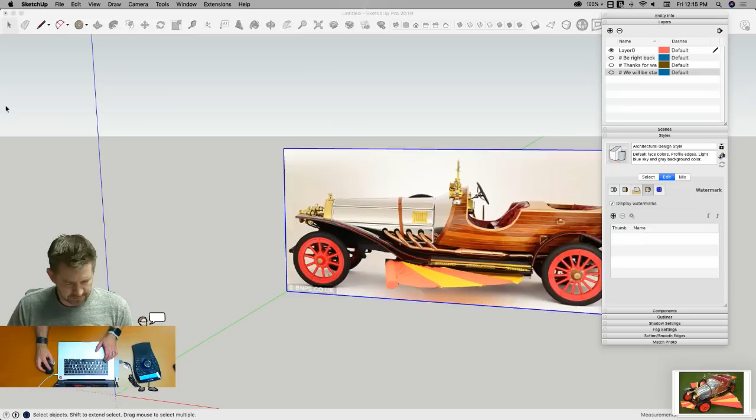So now let's load that as a watermark. Andre says you can convert it on any web-based service. Does my laptop count as a web-based service? That's where I'm working from. Probably not so much. All right, so we'll get this.

Oh wow, LT7 did that drawing, the steam engine drawing, with his students. Oh, that's awesome, to get them involved in engineering. That's pretty cool, I like it, makes me excited. Very cool, you did a great job, that was pretty awesome to see.

All right, there we go. So this is what I'm gonna work with. Now that I have some stuff in here, I'm gonna go save this. Save on the desktop, I'm gonna call it CCBB for short, because I might have a typo and then this whole stream will be rated PG-13 because I put the wrong letter in there. All right, so here's what we're gonna work from.

I'm gonna use this primarily as reference, so everything stays relative size-wise, and then do most of the modeling based off the image over here.

So one of the first things I'm gonna do is get this front part modeled. It looks like it's actually like a circle, like a cone shape that goes out like that, and then kind of blends down maybe into the bottom down here. Actually, this may just go all the way around. And we're gonna have this cool lofting shape we'll be able to pull up right here. See right here? We'll do a loft, kind of Iron Man's helmet kind of thing right there.

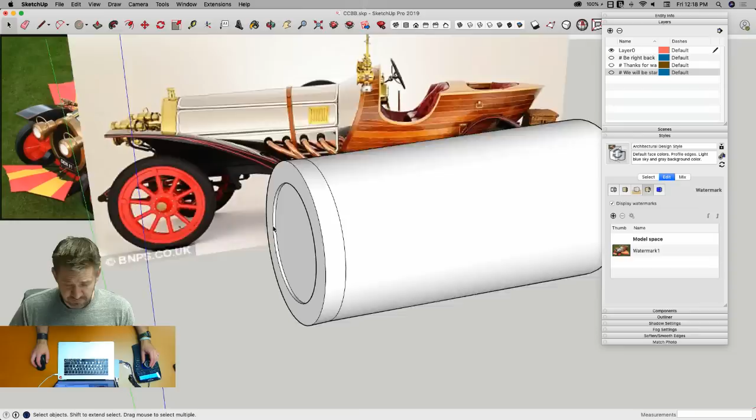I'm trying to think the last time I watched this movie. It's been probably years, I think I was a kid last time I saw it. Yeah, I know I've still got T-Rex arms. I was just about to say, it does look like that. I'll just try to hang back like that. No, it doesn't help.

Yeah, I don't know, is my screen capture not working? Hold up. Get that back up and running. There we go, my shortcut keys weren't happening.

All right, so that looks pretty good, yeah, it's almost there at this point. I'm going to tackle this next piece, so this will be a loft right here, but I'm going to pull this back like this, go up to about here.

Draw on my broad stroke shapes. All right, so that's my body there. And stop and look. All right, yeah, I don't think I've ignored anybody too bad so far. Or did I? Nope, right.

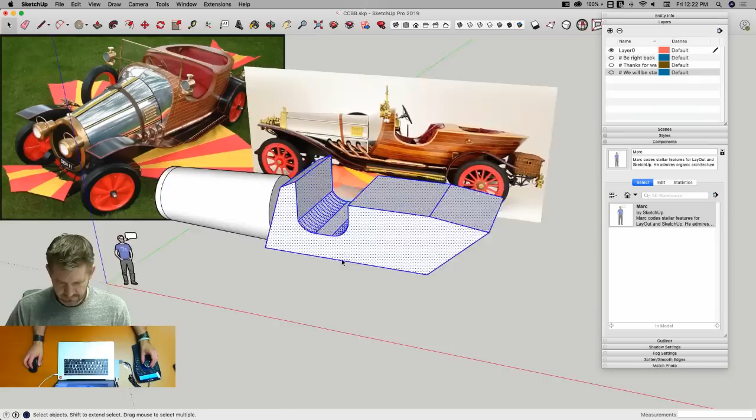Christopher Ryan saying the front is more ovaled, I think that's the word. Is the back oval this way? It actually looks like a flat top. Interesting, yeah, it does look like it's all kind of, so I may actually have to pull this up like that more, and then we'll dome it over, round it out with some lofting over here.

Yeah, you guys are looking at more images because I'm not, obviously. It does look like it ends up close to a circle here, so I think maybe I'll see how this looks. We'll grab just the front like this, scale that from the side around the middle, and bring it in like that.

We got the tried and true question here, what's the mouse you're using? All right, I'm going to do this once.

Just for reference, this over here on the left, this is my MX Master from Logitech. It has a bunch of programmable buttons, there's one under the thumb, programmable buttons over here on the side. The wheel, everything on there is programmable, so I have about 7 commands held on to this. Over on the other side, we have the SpaceMouse Enterprise from 3Dconnexion. That is a thing that I move the model around with. As I move this, touch this, you can see it moving in 3D space. I also have a bunch of shortcut keys, modifier keys, that sort of thing. So check it out, 3Dconnexion, it's a great mouse, especially if you spend any serious amount of time modeling.

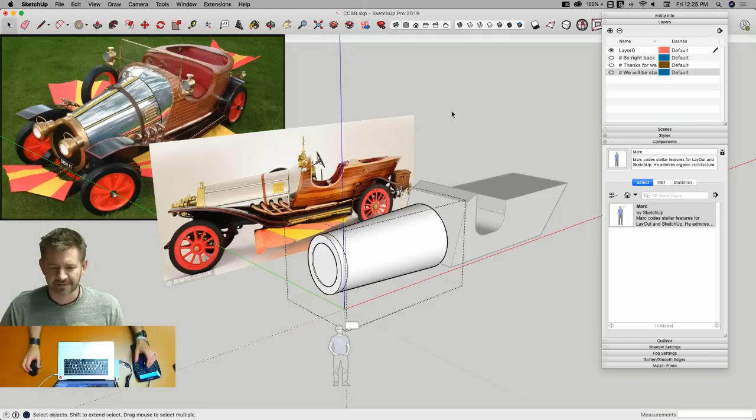All right, so on this one over here I want to do a couple things. I got to get this shape. So you can see the shape is kind of simple from the front, it looks like it comes up, does an arc to the middle, same down the other side. But then if you look at it from the side, it actually arcs this way and comes out at the bottom.

So I'm gonna make some geometry. It's gonna be 2 pieces. I'm gonna start down here. I don't know, this width was kind of arbitrary actually. All right, so I'm gonna start by, all right, I gotta hide this right now.

So it looks like the first thing I'll do, sorry, I know I'm jumping around right now, trying to organize my thoughts, it's a hectic affair. All right, so it looks like we kind of go straight and then curve off right here.

So I'm just gonna try to start with a standard arc. I'm gonna draw a line over, arc from here to here. And then it looks like maybe we got an arc from here to here. So that's kind of what I'm reading right here between these 2 images. And then this one right here actually comes out kind of like that.

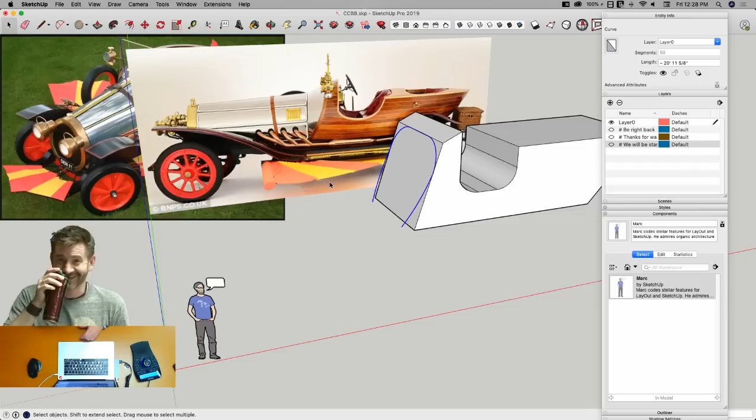All right, so there I got that. I'm gonna go to unhide all.

I know I probably already, I can hear it somewhere in the back of my head, the people who are going, that's not how you're supposed to use hide, you're supposed to put stuff on layers, turn layers on and off. I don't disagree with that, I understand that, it's cool, we're cool. Generally speaking, I would agree with that. I tend to use hide just as a way to clean up my screen temporarily. So that's kind of what I did there. I hid, I almost said hided, I hid just long enough to go in and do the cleanup that I needed to do. So forgive me if you're a hiding purist and only hide when stuff's on layers.

All right, I'm gonna move this piece. See, I just created a plane at the bottom of where my curve is. I'm gonna move this piece back so it comes right up against the edge. And then I'm gonna draw a line in context to break this circle.

All right, so now I have that shape. I'm gonna grab that outline, I'm gonna weld that, and I'm gonna copy it. I'm gonna leave context and paste in place. Now I can take both of these and temporarily hide them.

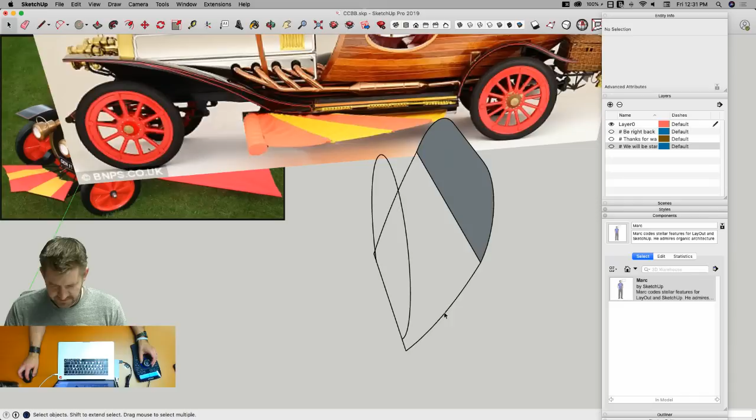What's going on there? What's that about? All right, scoot this all back to line up. Is it vertical? Something's not right here, something's not lining up. All right, there we go. It's up, I was trying to move it left and right.

Oh no, just a little extra segment, extra line. Not a huge fan of drawing lines. Really hard to zoom in and out of. There's nothing there to zoom to.

Henry's saying this is painful. I know, we're just one second, give me one second, he's almost there. I'm setting the stage, imagine if you will.

All right, I'm gonna grab this all right now. There we go. And we'll do the same thing over here. All right. What just happened? All right, give me just this.

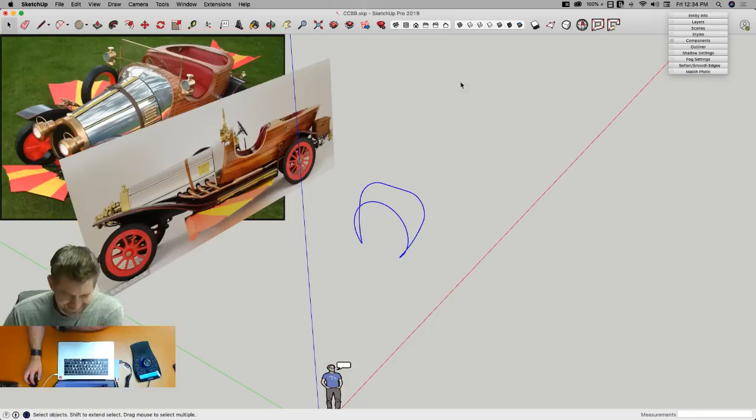All right, we got some funny comments on the YouTube channel. All right, let's try scanning these two.

Everything works great till you got 100 and something people watching. No pressure. Yeah, you guys see me push the button, right? I mean, you can see, oh, I missed. Ha! Well, that's what you get for being a smart guy.

All right, I'm gonna try. That's weird. All right, I'm gonna try. Let's go back here.

I'm just gonna restart SketchUp, will that deactivate it? Yeah, I mean skin contours, like nothing's coming up. The UI is just not even showing up at all. So I'm gonna save and close it.

And we'll start it again. Odd. Well, if everything worked, it would just be too easy, unbelievable. Yeah, so what, everything's not perfect like that. All right, let's try.

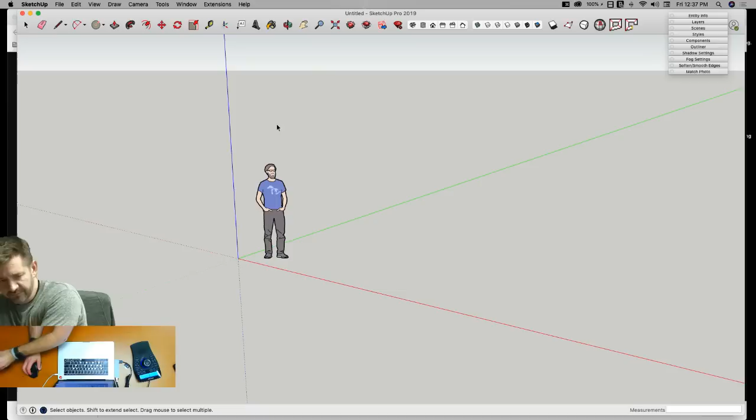How was everybody's weekend last weekend? I didn't get to hang out with you guys. I was near Boston doing some training. So yeah, we didn't get to hang out. I hope everybody was doing well. It was good, it was a lot of fun for me to hang out and teach people SketchUp. It's actually something I've never done before. I've never actually taught a from-the-ground-up new people training, so it was kind of cool to get to do that. But I did miss being here.

It was a bummer. All right, let's re-enable this. Apply changes. And not Fredo Corner.

Oh, now I got to restart again to get that to show up. Curviloft. There we go. Whoops. Yay!

Get this side view. All right, so would Sandbox help for this issue? I honestly don't use sandbox tools a lot for something like this. I generally end up using sandbox tools on a flat surface.

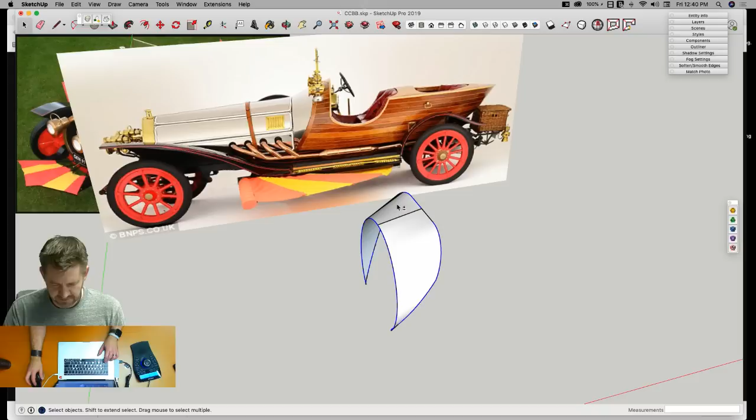This is actually something we were talking about before, the idea of having a symmetric component and modeling it in half. It looks like most of this vehicle is actually symmetrical, so we could model in half.

But I'm gonna work back from this piece in the front and just kind of work back. So I'm gonna take these two, group them together, explode those, and then we can come in here and smooth that piece. And we'll go to edit and unhide everything.

All right, so that's what we got going on now. I'm gonna take this piece, slide it back. Ooh, look at that.

Man, it looks long though, doesn't it? Let's turn off perspective and look at it right up against the picture. I'm gonna go to camera, turn on parallel projection. That looks great, kind of what it does, huh?

All right, we're gonna stick with it. Slide this back a little bit. All right, so now we got, this should line up at the middle there. That was not the middle. All right, so I'm gonna get the middle of this piece, line it up.

All right, so now we got to get this thing all flowy and smooth. I got to get out of this. Some people work in this kind of camera view, but I can't do it.

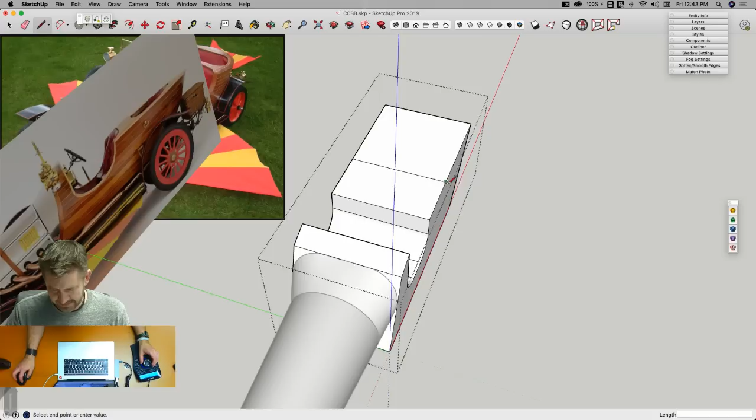That Dano guy, I wonder who that is, just said it's a phantasmagorical machine. I don't even know if that's a word. Does that mean anything I model is right? Exactly, I like the sound of that.

Or if I can do this with a standard arc at this point. Let's see what a normal arc would look like.

Looks like I just overcompensated a little bit there, huh? A little too much, I think. But here's what I'm going to do.

I'm going to grab this and slide over here, trying to be conscious of SketchUp's attempt always to join geometry back together. I want to keep away from that. And I'm kind of wondering if...

More like that. Maybe we'll grab the whole thing and squish it in a little bit. Bring it over here, flip.

How does that line up? Oh, that looks okay, looks like a toilet seat actually. Kinda does, but hey, it's not my fault, it's just the way you design a phantasmagorical.

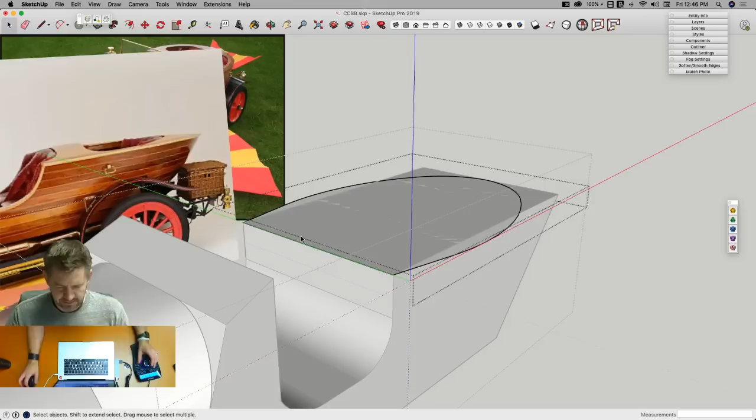So I'm going to get a couple pieces. Here's my thinking, this is the thought going through my head right now, good, bad, or whatever. Is that, you know what, this is actually going to be...

So ignoring the doors right here, this definitely looks like it tapers down into the end of this cone shape right here. So if I was to draw a line like that, draw a line over on the green axis till I hit this face, and then maybe something back like that.

Okay, this is something. I am going to use my hide rest of model command. So what I'm looking at, I realize I went mute there for a second. Sometimes you just can't think and talk at the same time. So what I'm thinking, I'll get this copied on the other side real quick with a couple lines, is that should taper together a little more gracefully. So I think what I'll do is take that break, where that line breaks, right here, and see where that runs out and hits this curve. It's like right there. I'll take that straight across the green axes and bring that back up to the front too.

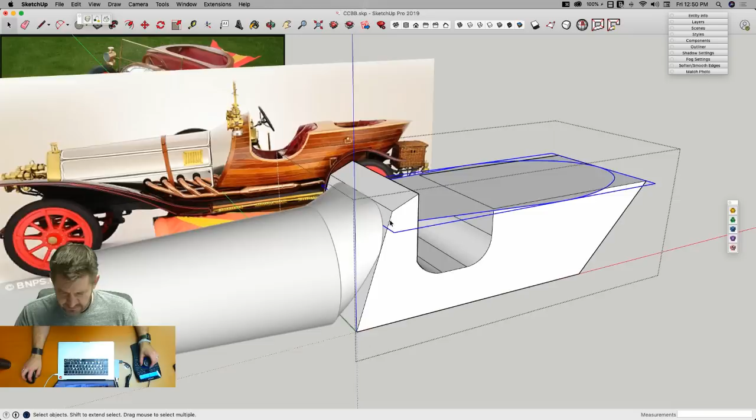I'm going to copy that. I'm going to enter this group, hide the rest, and then edit, paste in place. So I just pasted a copy in here, and now that should, if it hits, it doesn't quite hit. I wonder if I can bring it back. All right, slide it up just slightly. Doesn't quite hit, so I'm going to scale.

All right, I feel like you guys should be talking in the background or something. Like everybody's just watching me.

Lawrence has some good insight into this movie and the book. He's saying the wooden part that you're modeling right now was actually a rowing boat. Thus the boat-like shape, which makes a lot of sense.

All right, so I feel like we should be playing this song in the background too. Everyone's singing along on the YouTube channel. This is classic. Has anybody watched this movie recently? I'm just wondering. I mean, I know it's a Disney movie, but I'm wondering if it's held up, you know?

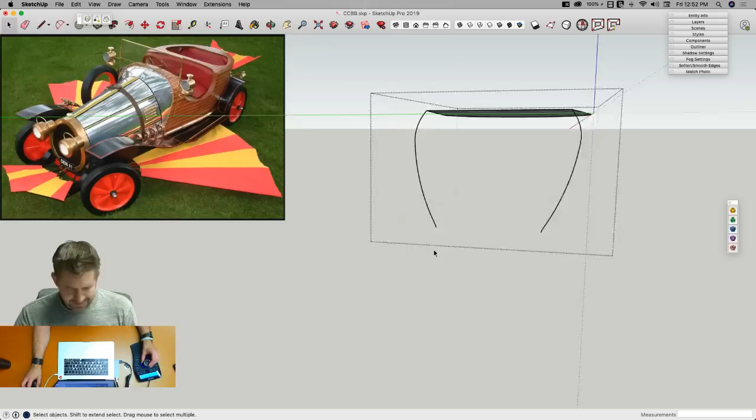And now it's gonna be a challenge because I'm gonna have to come out here and hide these temporarily again. Let's see, let me just grab this one face. Come in here, get rid of the rest of the model, and then paste in place, is it gonna hit any geometry? No, all right, so now I know what I'm doing.

More or less, I'm gonna grab this line, slide it over to here, copy it and slide it over to here. So that's the very bottom. Those should probably flare out a little bit. That actually, those will be like kind of like arcs. And then I'm gonna do this.

Alright, but I gotta get those arced out first. I'm gonna draw it like this, and take it over. At this point, I should just cut this thing in half because that's too much arc on the bottom there. Let's take that across like that. That looks better. I'm gonna do that right now.

I'm just gonna go like this, and get rid of half of everything. And save, because you know, you guys already know, I don't have to say anything else because I saved. Alright, I drop that straight down to where it would hit this line.

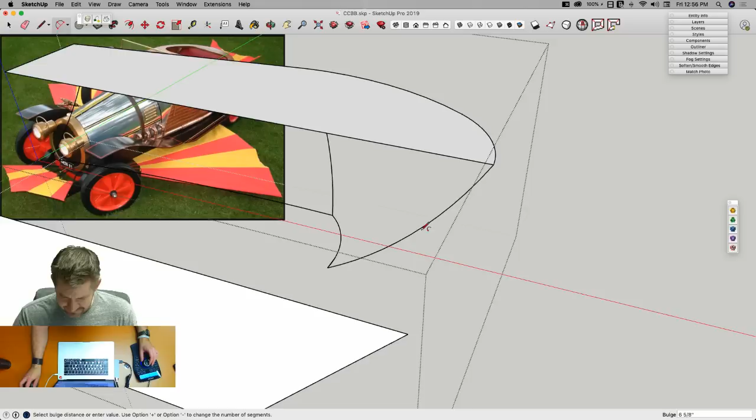Alright, I'm gonna weld that. Nope, I'm not, because I missed something. Oh, got some stuff going on here. Got more stuff going on here. Let's try that. Weld that. Nope, something else is going on over here. Got a secret edge or something happening.

So I just weld those, that becomes one curve. Weld again, there we go. 1, 2, 3. Oh, dang. Got another line here, just breaking stuff all over. So this is stream of consciousness modeling, where I just come through with less of a plan and more of a feel for what I want to get. Alright, so I'm going to try.

Meh, I don't love that shape. Sorry, I know sometimes I put myself behind my head. I don't love that shape, but at the same time, this wheel well is actually going to come in right about here and cover it up, so I'm not really stressed about that. I'm going to go ahead, go with it, see what happens. And then we'll do this front section as well.

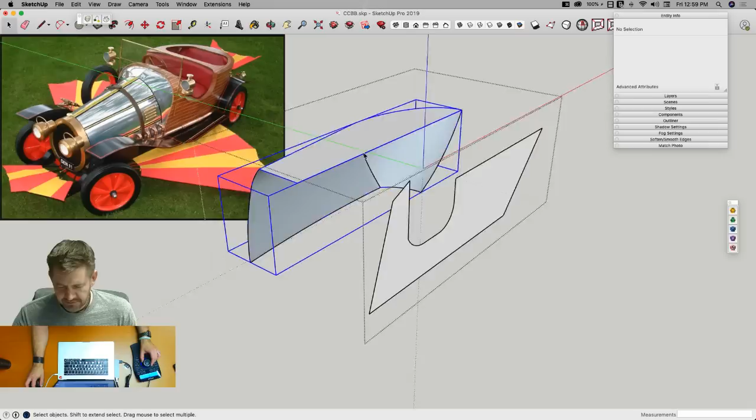Alright, now that I got that, I will shift copy, mirror it, and then throw it back together. Get rid of this. Alright, let's edit, unhide everything. Alright, and our curvy surface is coming together. Nice, looks pretty good. Hey, thanks.

Alright, so we do have this surface continues on up. It actually follows this. You can see this wood section right here follows the curve of our metal here and goes a little bit further. So I'm gonna say approximately exactly here-ish, right there is how far I want to take that out. See that? So I want to actually run a surface straight up, over and back down, and then I want to project this line onto here.

So now I'm trying to think of what the best way to do that. It looks like it's not quite the same curve, it's a little bit different. So maybe I'll just draw the curve separate. So if I come straight back, it's going to go up a little bit, maybe here. I'll grab an arc.

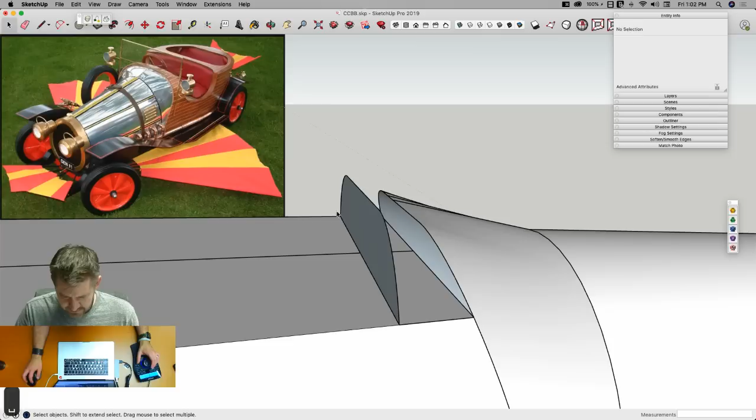I'm gonna do the same thing. I'm gonna come in here, grab these lines right here, Control C. I'm going to make a new group, come into this group, edit, paste in place. Hop out one more time. Draw a line from here to here, and a line from here to here. There we go. Copy these two, Control C, hop in here, edit, paste in place. There we go. Oops, I only got one of them.

There it is. All right, get rid of the extras, get rid of the excess. That's excess too. Grab all of that. Grab all that, skin it. Oh, I love when stuff works out the way it's supposed to.

All right, so now I can take these 2 pieces, make them a group, go into that group, explode these 2 pieces. They join together. Oh no, because I had these 2 pieces separate. Do I want to join those together now? Yeah, all I'm gonna do is cut the... yeah, I'm gonna do it. There we go, just so crazy. All right, Option, erase. Option, erase. And actually, we can just get rid of these pieces.

All right, she's coming along. Save.

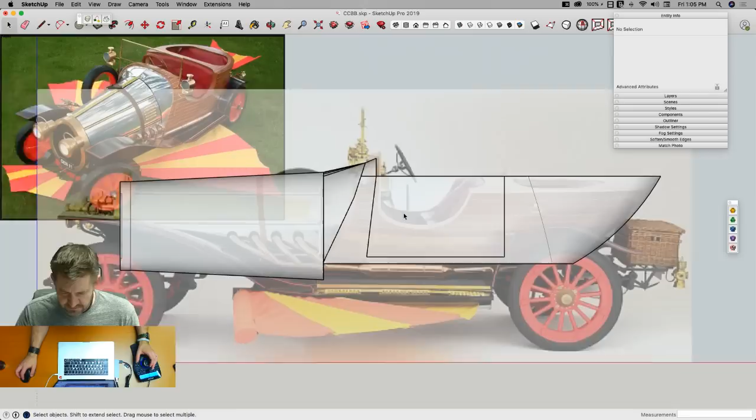All right, so first thing I'm going to do is get that down. It looks like right about here. And if I stay on the red axis, come over to about there, and then I'm going to have one, looks like a little bit of a more gradual slope here, something like that, and then...

I don't like that because if I use just the standard arc tool here, no matter what I do, I'm going to get this. So one of the things I can do, if you don't have extensions or anything like that, or if you're running on the free version, is when you have these two, what I would normally do at this point is go grab Bezier curve, throw that Bezier curve in there, and actually use this first curve as kind of my parallel line on that first part of the curve, so it actually smooths that out. If you don't have Bezier curve installed or don't have extensions, the other thing you can do is draw your first two arcs, then come in and draw kind of an arc between them to smooth that transition out.

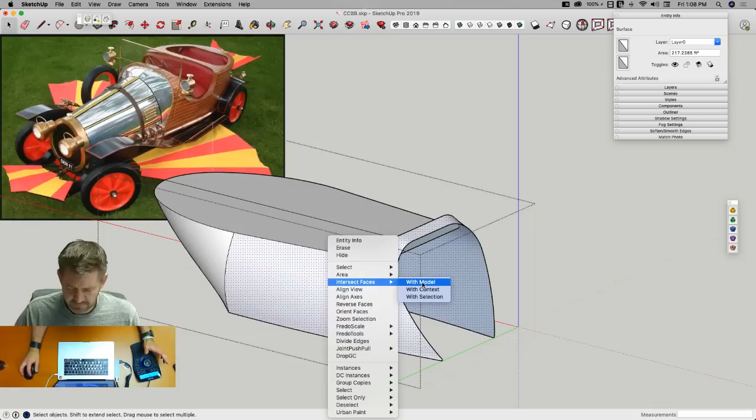Okay, so basically I'm just using this as a cutting piece. What I can do now is select this surface and right click, intersect faces with model. That's going to say any place this surface intersects any other surface in the entire model, I want to break it. So I'm going to try that and see if anything weird shows up. Nope. Sometimes the reason I say sometimes is if I have a hidden piece, or a piece outside of context I don't remember, it may cause a problem where it chops that geometry somewhere. In this case, it was all right. Did not cause an issue at all.

All right, so if we do that, we have that. Pretty cool, that looks like that'll work.

So a couple more things are happening here. One is that this has a little bit of an arc to it, something like that. And now, like I was saying before, this surface actually kind of bubbles up just ever so slightly.

I'm going to try Soap, Skin, and Bubble for that. So far I've used Fredo tools to do all of my arcing and that kind of stuff.

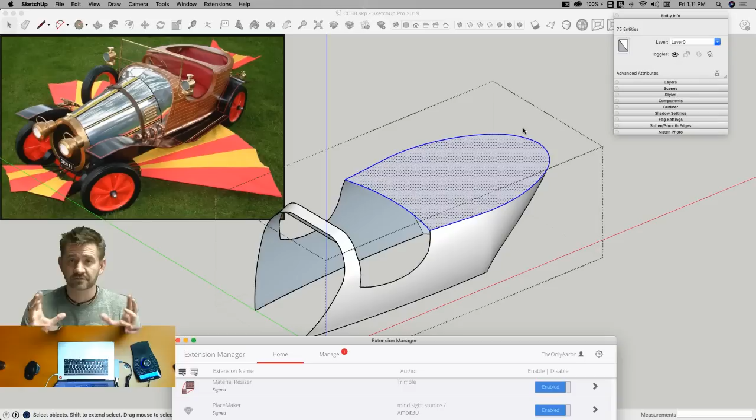My only complaint about it is the UI. If you have it enabled, the UI shows up all the time whether you close it or not. So I tend to disable Soap, Skin, and Bubble, because otherwise every time I open it, it pulls up the UI. You guys can kind of see, oops, this shouldn't be open as I give this example. I generally only have the stuff on screen that I'm using right now. So I turn, even Curviloft, which I've been using, back off again because I don't want it floating around on my screen, just the tools I need. So for that reason, I do have it disabled right now. I'm going to go ahead and re-enable it, apply changes, and you see there it is. So it's not a big nuisance, but if you have it enabled, even if you close this, when you start SketchUp again, it will show up.

All right, so what I'm going to do now is take this surface and skin it. When you first skin it, it's going to show you this grid. The denser the grid, the more smooth the final bubbled shape will be. Generally, the thing you want to keep an eye out for is these pieces at the end, that's where you're going to actually end up seeing maybe jagged shapes. So it's 10 divisions right now, I might jump up to 15. That looks like it'll work okay.

I'm going to go ahead and hit enter, and it now created that group. So it created that in a brand new group, laid down separate from the surface I had before. So brand new everything. What I can do now is actually take this and apply the pressure to it. So if I pick that group and hit the bubble button, it comes up and asks me for pressure. Let's see what 10 does.

You see, 10 pulled it down. The shape's reversed, so having a positive pressure is pushing it down, because pushing it in the direction of the white face. Just realized I'm not in perspective. So if I want to bubble up right now, I just have to put minus. So if I put minus 10, it'll push up like that. That's actually not too bad. Just for fun, let's put minus 100 and see what happens. Ooh. Minus 500?

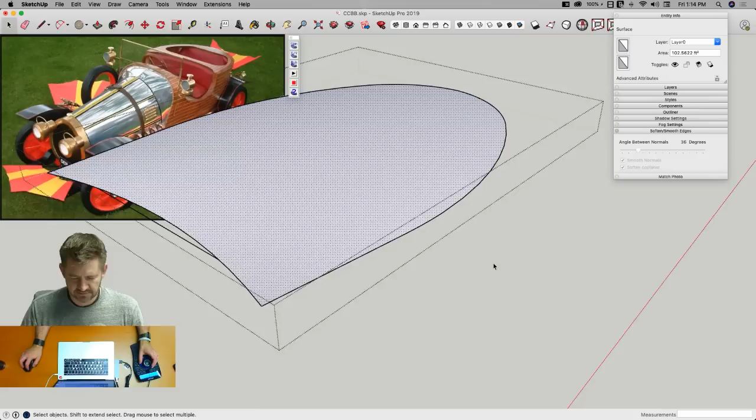And then select and reverse my face. Oop, you know what, actually I got an extra line here too. Some extra segments I want to get rid of. Before I merge this with the rest of my car, I'm going to get rid of that initial face, and now I can explode this.

All right, so there, whoops. Uh-oh, what happened here? A little overlap. Huh. All right, well, we'll need to fix that.

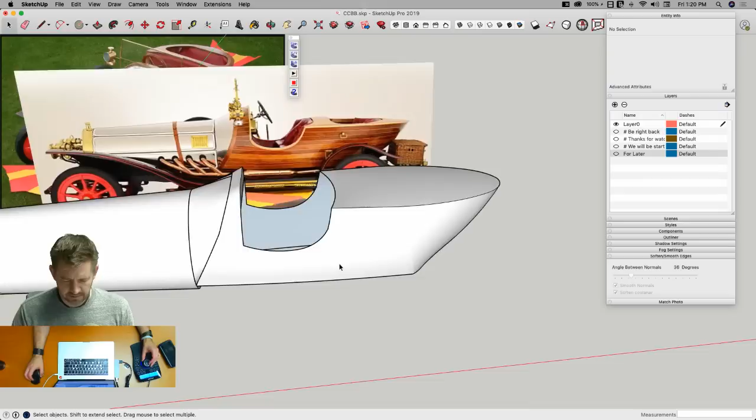Whew, that was loud. That was a loud noise.

So I think I'm gonna do that. I'm gonna trace this. Kind of looks like this is all one flat plane on the front, and then it just merges back with the side of the car. So that's cool, because this will be pretty easy.

I can actually trace this off the 2D shape, give it the depth I need, do a push-pull to make it long, and then bring it over, slap it on, and intersect it with the other side of this car. It does also make me think there might not be a reason to keep these as 3 separate pieces anymore. So I'm going to make that a group, go into the group, explode those 3 pieces, and now I have a single piece there. I'm going to call that good right now.

And we'll hop in here. I don't know if this has ever happened to you before, but my model's getting in the way of my reference image. Nice thing about reference images is that SketchUp shows them the same front and back, so if you ever have that situation, you can hop around to the other side and just trace it from there.

All right, I am definitely going to use the Bezier tool on this one. It does look like we have a flat section right here, so I'm going to trace that like that. Now I'm going to draw a Bezier curve from here. Let's see if we can do this all in one go. You know what's happening though? It's not showing my line on the back, so that cool trick I just showed is totally not useful.

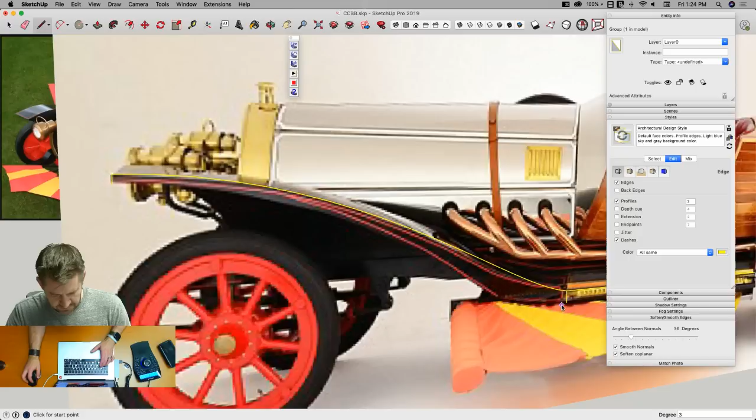up, and then over. All right, fender chunk number 1. Bring that back here. And it looks like I can start with a standard curve maybe, like that. Offset that to the opposite side.

And then maybe another, I'm going to give a little bit of vertical here. And because this is kind of going 2 directions, this is another spot where I want to use Bezier for sure. On my first line, to actually be parallel, I want that first curve to pull off of where the end is here. So I'm going to grab it like this, pull this direction, and use my lower curve to bring it back down.

Same thing here, this way. Next one down. There we go. All right, so that right there is my fender. That's pretty cool. I'm gonna clean up some of these breaks and the curves.

And I'm gonna grab all of that and make it into a group. I'm gonna go back to black lines too. Yellow's too hard on my eyes.

All right, one moment. Oh, still looks like most of our comments are coming through. Well, some of them. For some reason, Super Zorg's not showing up. I don't know why. Our streaming stuff is opposed to it.

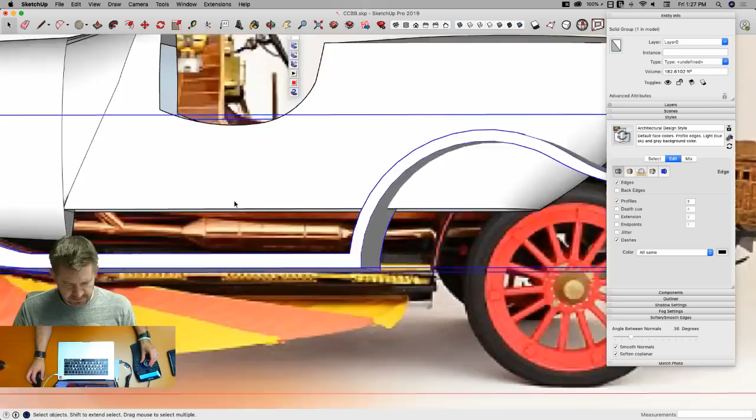Well, how about that? So, what do we do now? I'm kind of thinking that considering a lot of this will be covered up, I might do something like... trust me, it's gonna be awesome.

All right, just to give me something underneath there to attach that to. Something like that. In fact, I may even go so far as to come in here. Just get crazy. This is just craziness. Pull that through too. How far should I take that through though?

Not quite that far. I do want to see everything on the outside, so I'm going to toggle that back on. It's about to where it hits that fender. All right, I'll clean that up in just one second.

All right, now I just need something to attach to under here. Obviously, this is big, this is too big. So I'm going to come in here, and because it's separate, I don't have to worry about geometry merging, which is nice. It looks like it kind of comes out maybe there. It's actually in past the front, so it goes to, at least on the front, like about there. And then I can take this and pull it back in, something like that. That's pretty sweet.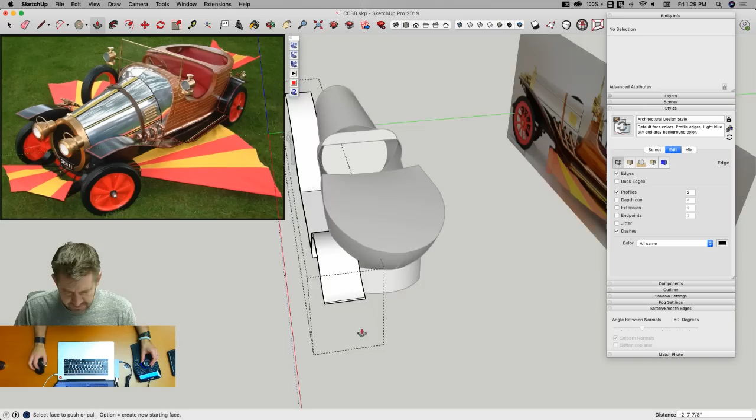But that's all I got. What I'm going to do is find a spot that's the same. So I'm going to grab this middle point right here, and I'm just going to draw a line back like that. I'm going to grab both these pieces then, copy it over here, scale both of them together to -1, and now when I grab by that same point, when I drop it right here, it'll be in the same spot on either side. So it just keeps me from having to go to a lot of work to get that stuff lined up like that.

All right, that looks pretty cool. I like that. I think I want to do something here because this is kind of nondescript. There's something going on underneath here. I'm sure if you were a car knowing type person, you'd know those undercarriagey type things. I don't. There's stuff under there that does stuff.

I know that. So I'm just going to take this little block I've created. I'm going to kind of shrink it together so that it laps into the circle right here. I'm going to grab this piece right here, scoot it straight up, just so my geometry is all merging in there. And then kind of does this too. I'm going to grab this line right here, just kind of now put these tires on. Actually, something's going to have to come out further.

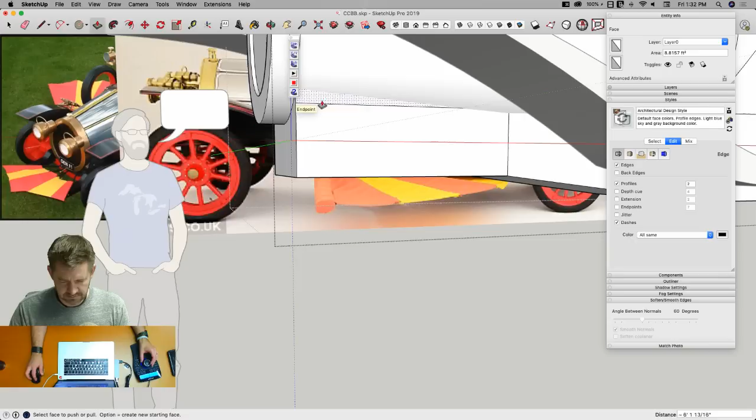I like this so far. You guys following with me? Does it feel okay?

Let's see, I want to kind of close this up a little bit. Look at that. I got to figure out how much detail I want to put in here. This is kind of an end of the day kind of thing.

But what I can do right now, I could come in here and I could weld this and do the same over here. Get rid of that. And right click and, oops, not right click, extension, weld that. Is this all one piece and this one piece?

So now I can take these pieces right here, hit tools, Fredo collection, Curviloft by Contours, and just for right now, close that in. And I can explode that.

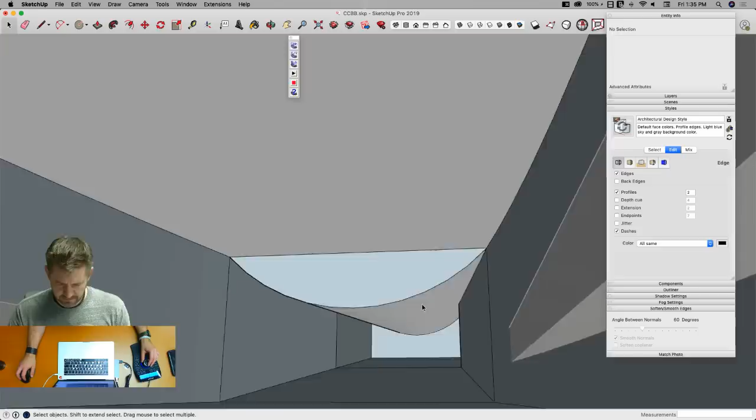This has become extra here. Get rid of this loose geometry just floating around inside. I don't have a specific reason to worry about keeping this solid, but it's just good practice to not have loose geometry all over the place. Usually, if you stay on it and clean up your geometry as you go, it's not too big a deal to keep that geometry looking good.

All right, so there we are so far. Not too bad considering we're only an hour and a half into this. That's awesome. I feel good about that.

That looks cool. So couple things now, what I'm thinking about, what's next? I try, in general, to rough in geometry as much as possible, get the geometry looking good before I start worrying about details, but most of this thing is details. That was about the most rough geometry we have on here.

So I may start into, let's do the wheels real quick. Let's hop in here, throw these wheels together and get them on there, and then we'll go from there and start maybe putting some other stuff. These pipes look like they'll be fun. We'll do some follow-me-ing, carve some details in up here, maybe throw a windshield on, and yeah, we'll get this roughed in pretty quick, I think.

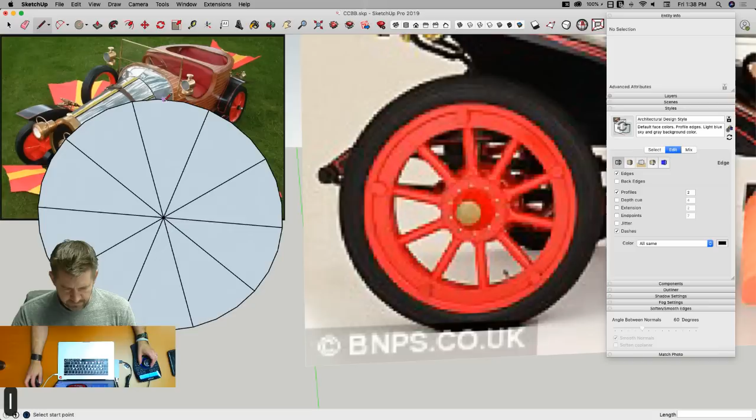So that's horizontal right now. That's perfect. So if I wanted to make like a follow-me shape to extrude around to draw this hub or the tire, I could do that real quick and easy by drawing it on a vertical plane and then just having it sweep along these pieces here. So I'm gonna do that.

I'm going to come out like this. Actually, I want to go bigger than that even because I got to put the tire on the outside, so I'm going to come like this. And now what I want to do is draw what I think the cross section of this all looks like. So I think what we're going to have is something like this - this is going to come back a little bit, and this come down, let's come over. Something like that. So that's this section right here.

And then above that I actually have my tire. So I'm going to go with an arc. I'm going to start just inside because the tire is going to be inset where it sits inside, and I'm going to come up to, let's see, how does this look?

I think that'll work. What was that line? I don't know what that was on. There we go.

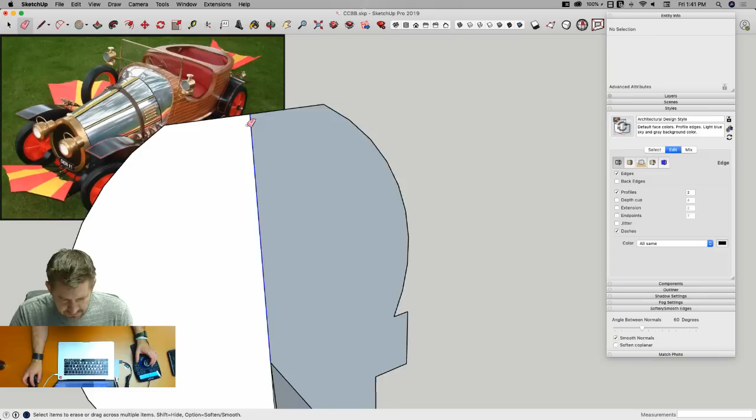And I'm gonna grab, copy that. Actually, let's command or cut, jump in here, edit, paste in place. And now I can grab this chunk of arc, follow me, and click on this piece. We're close, we didn't get there all the way.

The issue that we had is that these two pieces don't actually cross. So when I did a follow me, it started here, but this actually has to account for being over here. Same thing here, it stopped when it hit here rather than carrying through a little bit. So there's a couple ways I could go about this, and I'm trying to think what the best way is.

I think what I would actually do is take this, cut it back out, leave it altogether. I'm gonna edit, paste in place to put it back where it was, put it back on here. And I think I'm actually gonna model this in two different ways. Well, I'm arguing with myself, you guys.

If I take, oops, did I explode my component? All right, I'm gonna hide these. No, I'm gonna hide these, draw a circle. I don't know where to draw the circle to. All right, there we go.

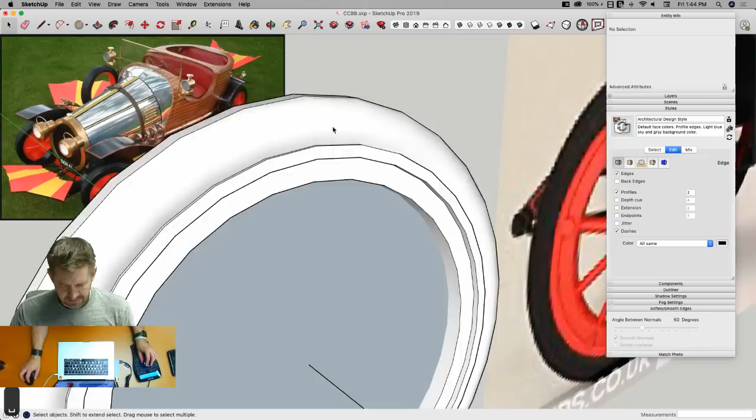Now, can work with these. I guess really the only thing these are going to do at this point is give me, well, I can still do it though. If I come in here and draw a line from here to here, draw a circle and then push pull it up. It gets me my spokes.

I really don't know, I'm trying to think if I made that component trying to show something cool, but it ended up not being hugely necessary by the time I was done. But hey, it's a cool way to get my spokes in, right? That's something.

And then I can actually get rid of my extra geometry. I don't need all these lines at this point, because that's really all I needed out of that. Oop, what is this little line in here?

Because what I was thinking is, well, we did this on another wheel too, where this detail - the problem I'm really seeing is a lot of the detail, these little pieces are on every other spoke and not each spoke. There's 1, 2, 3, 4, 5, 6, 7, 8. Okay, so there's actually 10 of these little screws on here, so I could have gone with that a little more, but I didn't.

All right, I'm gonna grab all of this and all of these and make that a component, and call that my wheel.

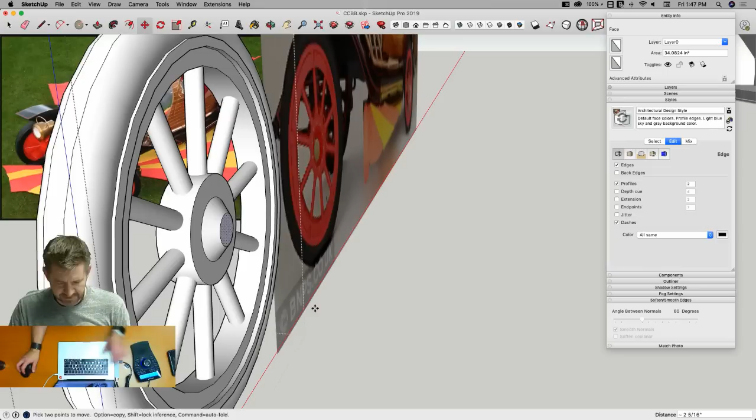And then we have what I think that looks like it'll work for our wheel. The other thing I might do, actually I'll come in here and just get a little - I believe they call that an axle nub, it's the official term. So something like that, that's gonna work for right now. And we'll take that thing, I'm just gonna arbitrarily just kind of slap it on here.

That's not gonna work right there. I'm gonna go back in and go back to my camera at parallel projection, go to my front view, and now I can actually line this up with where it looks like that is supposed to be.

I think about how that actually attaches, because that's out in the middle of nowhere, which is all right. You can see it does actually kind of have, well, like I said, this was a pseudo-real car, a realish car. So it did actually have all the suspension and all that stuff of an old schooly type car.

All right, I'm gonna bring these out this direction to where it hits the fender. I'm gonna take that option, copy it straight over on the green axes, right click and flip along green, because I'm really good at that. And I'm gonna slide it back from the hub to that fender there. Then I'll grab both of these and move them back.

I'm gonna go back to my parallel view, look at it from the front, and slide those, option key to copy straight back along the red axes to right there. All right, so we haven't really fine-tuned the connection. Oh, hey, look, this one will be easy. Just take this, pull that in, and it's attached. Boom, simple. Up here, less so.

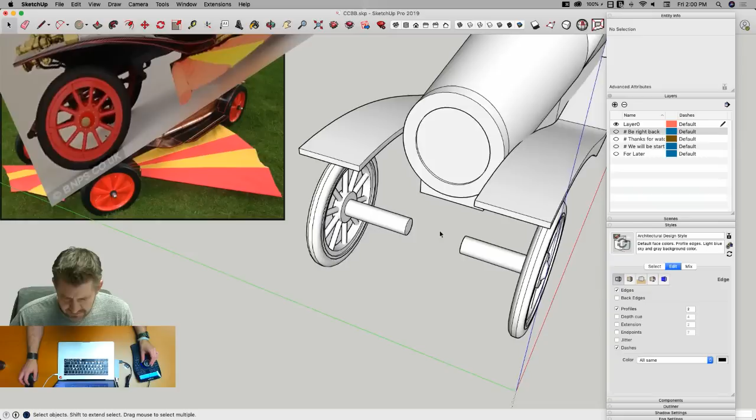And then from that circle we'll bring out a shape, and I'm gonna freehand this, you guys, just so—this is gonna be the lens of the light. Looks like it kind of comes out then maybe, and then possibly angles back like that.

I can't tell. Looks like there might be a teeny bit of a step there. And it comes back again, just a little bit of a slant like that maybe. And then it has more of a severe slant like that.

And then from there, come straight back. Some of my proportions are a little bit off, but what we'll do is grab the circle, follow me, and spin that around—see how close, that's not too bad. That's pretty close there. A couple spots aren't gonna work. This right here, I'm gonna broaden that out using scale about the middle. Just pull that up like that. There we go. Well, maybe that was too much.

And some of this stuff, this all just needs like, just get longer. Just need to bring that out like that. That looks pretty close. And then it looks like what it's got is just kind of a handle thing coming up around that. I don't know what that is. Of course, it's a made-up vehicle, so it's not really a thing at all.

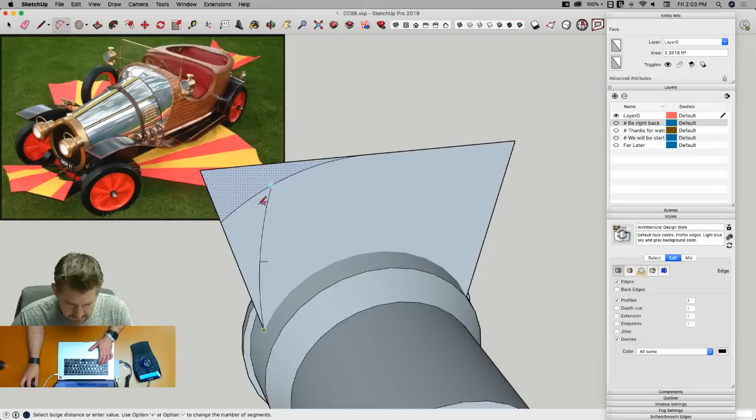Oops, that's not the end. There's the end. Grab these three pieces then. Tools, nope, Extensions, weld. And then I can actually just grab it and do the same thing. Use rotate to mirror that over. Looks good. Actually, I don't need the peek inside here, get rid of that because I just want the lines.

Right here at the top where I put that first line, I create a circle like that. Grab these two pieces, follow me, and that won't work at all. What happened? All right, let's try this one side. Follow me, here we go. Oops. Grab the other side, follow me. Yeah. Weld that back up.

I'm a little off axes here. Here's what I'm going to do. Oh, that's not quite the center, I put it in the wrong spot. So here's what I'm going to do. I'm going to come in here, and actually, let's make this easy to see, shall we? I'm going to grab the whole front of this light and hide it, so we peek on the inside. I'm going to draw a line horizontally from both ends.

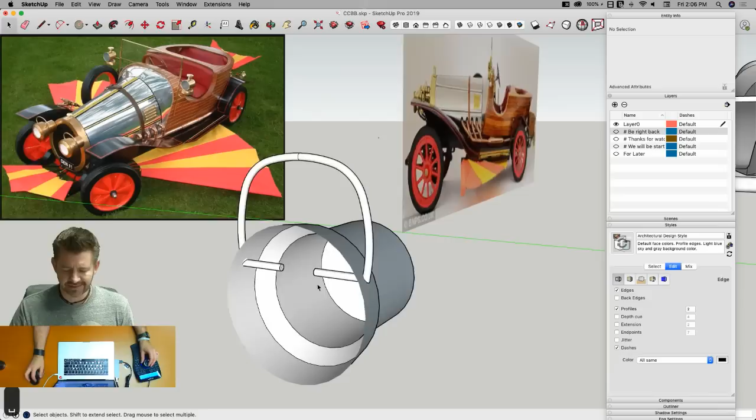So I'm going to edit, unhide all. I can grab all this, reverse faces, some geometry back here. All right, so I'm going to grab all that then, make that into a component called my headlight. And we'll stick it on the, whoa! One big headlight, that's all we need. We're gonna have to do a little scaling at this point. Let's scale that back down.

That looks better. It kind of looks like, this is kind of weird, but it looks like they're just connected to this front piece. So I'm just gonna do that. I'm just gonna have this piece, turn on X-ray, snap that to there. It's not quite the right spot. Slide it down here. Something like, let's get it lined up about the same. No, they're actually lower, huh? They're down. Okay.

I'm learning things. So this fender looks like it curves away from the body, maybe comes up like this, and it's a little further back. I thought it was just straight, but it doesn't. It actually comes away from the body up here, because this headlight is more like even, X-ray back on, like that, according to our profile image. You see that just right in the middle there. So it looks like what we got to do is we actually got to bring this back, because it does go out as far as the headlight.

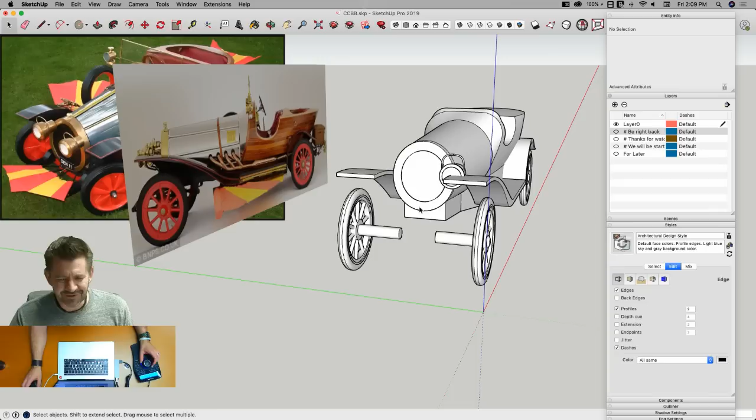But I do like the idea of maybe these fenders doing something a little bit different. It also looks like, both of them, that the fender actually has - did I make this a component or a group? It's a solid group. All right, I'm going to grab both of these groups, and I'm going to convert them into a component.

So now there are two components. When I make a change to one, they both change. The issue I'm going to have right now is if I come into this component and start drawing this back wall like this... oh, this is reversed. Sweet, no issue at all is what I meant to say. All right, so I'm going to come across like this.

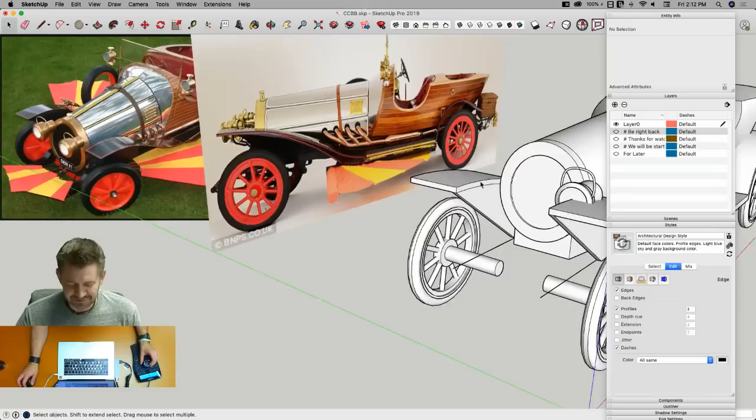It's not perfect. Oh, good stuff, good stuff right there. Something else I'll probably do is grab this.

And I'm seeing where else this hits other geometry. Does this actually touch? It doesn't. So I'm going to come in here, and I'm going to grab this surface and this surface, this surface and this surface, and this surface. Right click and say intersect faces with model.

That's going to give me a nice clean - oh, I missed a piece. That's going to give me the ability to come in here too and delete these extra pieces out. All right, that's looking pretty sweet.

Oh, this piece too hits the hood. So it means this surface and - actually I'm looking at from the inside. Grab both those, right click, intersect faces with model, and then I can get rid of that piece right there.

All right, cool. It's all coming together except for these pieces where it's not coming together, it's literally floating in space. I don't understand how leaf springs work, so I'm not going to get to that just right this second.

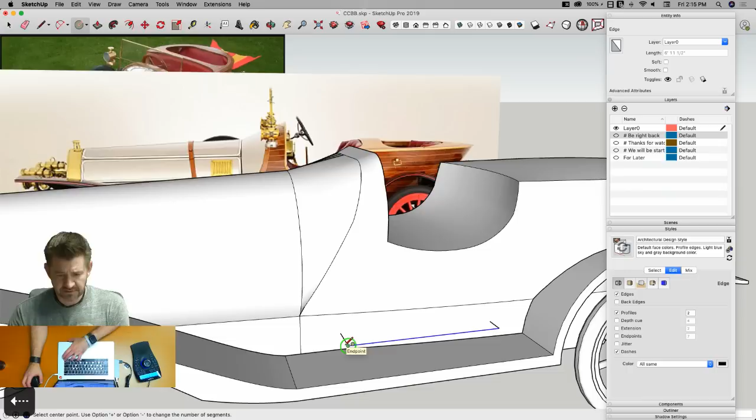Close it up. Is that 180 degrees? No. Didn't quite line up, so something's not right.

All right, let's invert that and just place it by hand. Grab a corner, stick it on there. All right, so that's my... I don't know what exactly that's supposed to be. Did they have catalytic converters back then? Catalytic? All right, so that's where my exhaust pipes are going to run into, going front and back.

I'm gonna pull these out. Now, what I gotta do over here is come up with my 4 evenly spaced holes that they're gonna come out of.

You guys still hearing that noise? Maybe. Is that better? You're right, my phone was literally laying on the mic cable. Did that improve it? Better? Hopefully everybody didn't just leave because of that. Good? All right, I'm gonna assume so. Let me keep it, it's okay for now. Yeah, I set my phone down, you guys, and it was touching the mic cable, so maybe that was it.

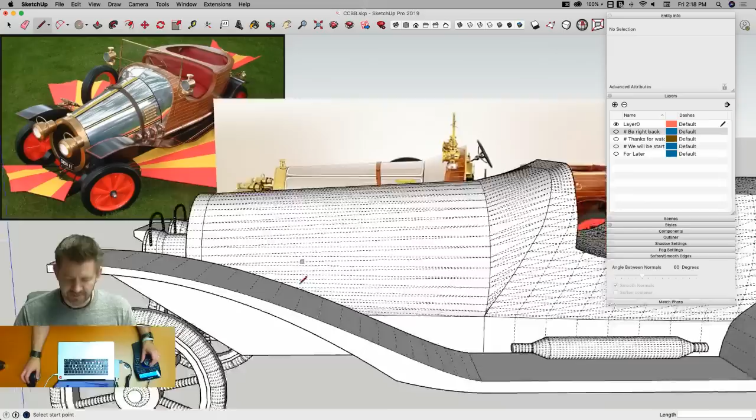So I'm gonna start with a single circle, draw it vertically, and let's see, it's about that big. I'm going to grab that first one from the center, option to the end of this line, and say /3, which is going to give me an internal array of circles.

Now I'm going to grab those, push them in, pull them out. I don't really care how far they go in or out so long as they completely break the surface at all 4 spots. Looks like I didn't quite pull this one in far enough, so get underneath it like that. There we go.

Again, all I want at this point is a broken surface. Actually, now that I'm doing this, let's set a length. Of course they won't be the same. If I pull this back to the same length... no, that's okay, I like uniformity. So those are my circles.

I'll go ahead and do this now, intersect those with the model. Give me those breaks right there. I can actually come in here and delete - if I delete the face circles, the sides disappear too, and I can get rid of these extra line segments. All right, that's looking pretty sweet.

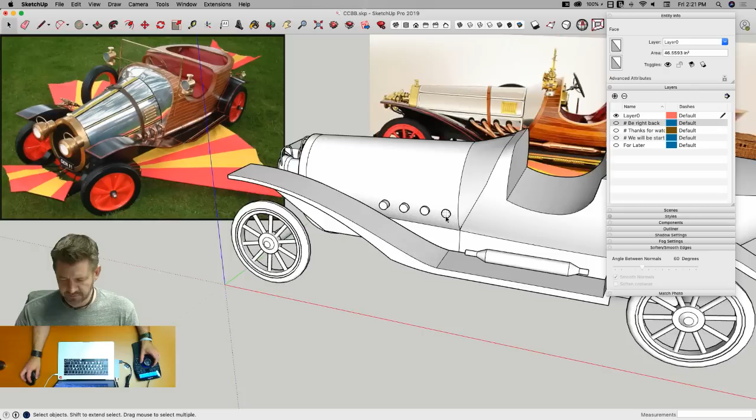So for each of these, just constrain to green, constrain to green, constrain to green. All right, so that's how far they each have to come out. And I'm drawing straight lines right now, but I'll come back in a minute and clean this up with curves. All right, so it looks like this one right here kind of sets the angle, and these ones go parallel.

Didn't go far enough. I didn't line something up right. Ooh, that's not lining up. Oh, because these aren't on the same axes. They're following... interestinger and interestinger.

All right, so they should be, because they're not actually in a straight line - they're slightly curved because of the way I warped it. So my reference line here wasn't actually on any kind of axis. So what I'm going to do is this. Yeah, looks good.

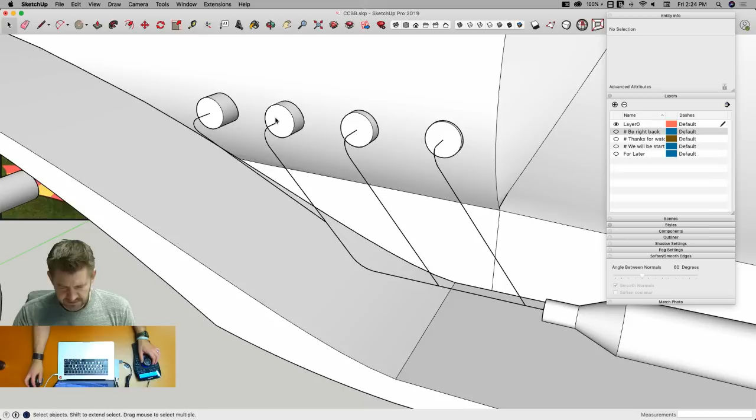All right, I'm going to come in here and, like I was saying before, in order to minimize the number of breaks I get in this pipe once it's done, I'm going to extension weld that. It's got a line break here, so it won't be able to, because those lines are broken, it won't be able to actually go there, but that's okay. Follow me with this. One piece done.

Now, next ones, I'm going to turn on X-ray. I'm going to click here, here, and then here. Follow me with this, and look at how that blends right in. Same thing here, I'm going to go here, here, here, here. Follow me. Boom. And then one more, here, here, here. That's all I need. Follow me. All right, that gets me this.

Now this is actually pretty messy at this point. There's a bunch of geometry that's just sitting on top of each other, and it's actually fairly ugly, so I'm gonna delete the pieces that I can. Nope, that was a good one. Maybe about it.

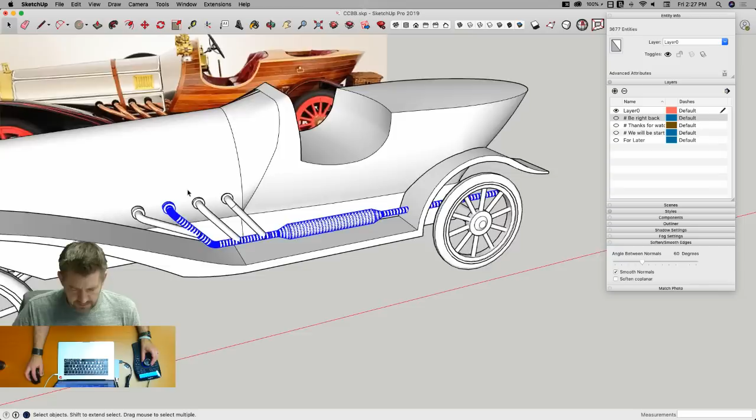Now what I'm going to do is I'm going to come in here and grab all these chunks. I should probably just do all of that. Right click, intersect faces with selection. See what that does. All right, so that cleaned up a lot of my stuff, made some ugliness that I may have to go back on.

Okay, undo. Undo that. Here's what I'm gonna do, I'm gonna delete this. I don't know why that circle's there. Get rid of everything I can. That's what that was.

Let's go spelunking. Let's head inside here. Spelunking? That's caves. What do you call it when you go in sewer pipes? Is there a term for that?

I'm gonna do this selectively rather than all at once. I think that's gonna help. I wonder what's going on here. My circle, oh yeah, that makes sense.

Fundamental, oh, zing, Matt Robinson, exhaustive attention to detail. That's why he's the man, guys.

My problem, I made like a serious fundamental issue here. I created a circle. I was not conscious or careful about the direction my circles went, and I created a mess for myself right here. Yeah, that sucks.

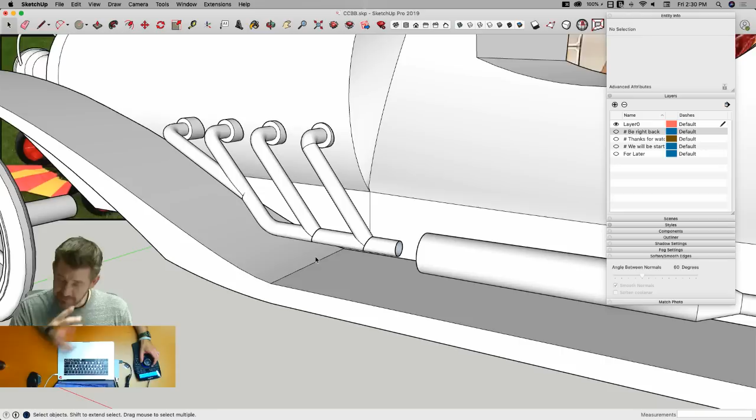I'm gonna grab these two real quick and just loft them together with Curviloft. It won't let me do that either. All right, we'll do this.

All right, that's gonna be our exhaust for now. Like I said, there was a weird thing that happened there because of the way I lined the circles up, so my joints are not as clean as I would like them, but for what we're doing in the time we've got, I'm gonna let it slide for this one.

All right, here's what I'm gonna do, the same thing I did before. I'm gonna draw a line out from this point, and grab both of these, copy, bring it over here, scale to invert it, and then grab by this point right here and just stick that right there.

All right, coming along. Get rid of these. Whoops, too much, got rid of too much. Delete these extra lines. Save.

That's right, I make the mistakes so you don't have to.

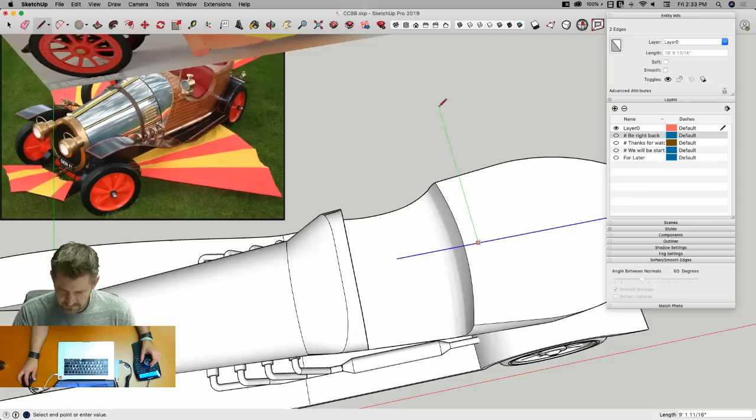Something like that, that's a lot more leg room in back. No, I guess that's not. People in the front can put their legs under here. All right.

Take that option, flip it over, and then I'm just going to push that through. Same thing when we were talking about welding before, you push pull.

If I welded that all together, I wouldn't have these lines right here. But right now, if I soften those, nope, I guess can't. Soften those, then when this surface intersects with model, sorry, I just got caught thinking.

Might be fun to do. No, I'm just gonna delete it to get that hole in there, and then I'm gonna actually use this piece to create that cavity underneath.

Let's see, how far down should this go? Should go down to here, but...

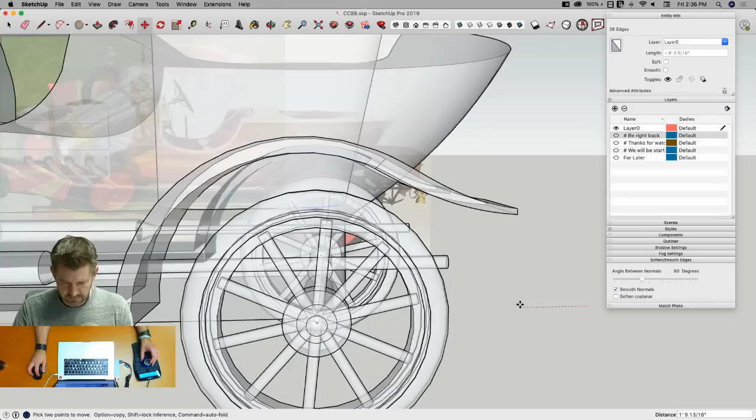Look at that, that seems an acceptable start to the back seat, or the rumble seat. I know that's what that's called. And...

We'll grab these two faces and reverse faces so the proper face is facing out. And now we just need to close up this little lip here.

See you later, Marvin. Thanks for coming by.

I'm gonna click this inside, turn off this, double click, turn off that, and that gets me just this line. I'm gonna try weld that all together, see if that works. One nice lip all the way around there.

Come in here, same thing. If I turn all of this on and turn this off, double click, that isolates just that edge. Extension, weld that. All right, I'm gonna copy that.

Make this a group, and go into said group, and edit, paste in place. Grab these two, and go head over to Curviloft, and can I skin that?

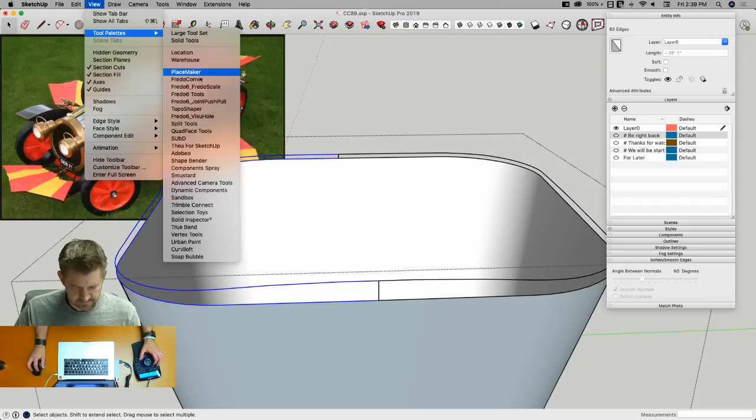Get rid of all of this. Push pull this straight up. And then I can just take this single surface, right click, intersect face with model. And that's not going to work because I already broke that other model.

All right, leave me no choice. I'll just take this now and explode it.

Come into context here, edit, paste in place. And with that, now we've got that rumble seat in there. I can just alt-erase my curves to go back to being one nice clean looking thing.

All right, moving on. I really feel like we got to put this windshield in here. This is actually going to be pretty easy. Let's just start talking and modeling. Right here, I'd say, I have a window that goes up that far, comes out—well, these are all going to change.

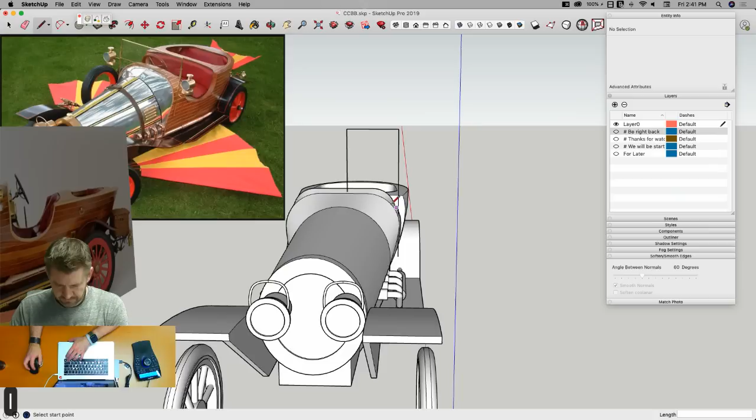Whoop, oh, I wasn't anywhere near the middle, I just picked an arbitrary point right there. So let's fix that, let's bring this out a little further. Then I'm going to grab all of this, find my middle point here, move it horizontally, move back this way—is that the middle? All right, something like that.

And this goes down awful far, so I'm going to break this, draw a line across like this, get rid of these lines. All right, and really all I need to do now is put a pipe all the way around here.

Let's be smart about this time, shall we? I'm going to draw a circle, make it a 12-sided circle. This is a small detail so I don't need a whole bunch of sides. I'll make sure I put it on the green axes. Now, oh, that was a little too small. All right, let's try that again. Circle, 12, make sure I pull out along the green axes.

And how big should this be? Should be about... that'll work. And I'm going to go here, here, here, here, and here, and then follow me with that pipe. The reason I'm doing that is so I get this nice clean corner right here.

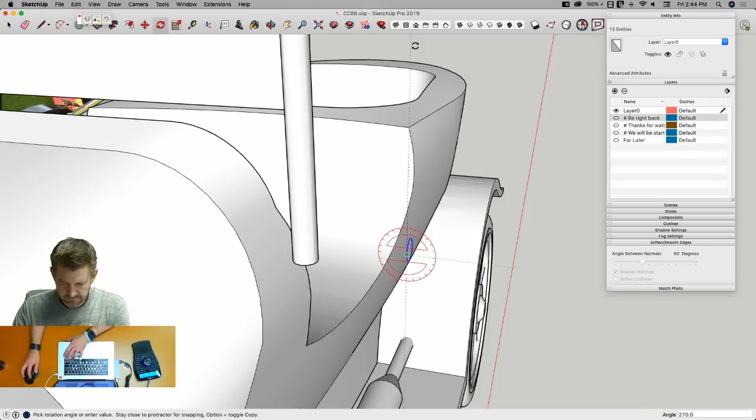It does have a second set of headlights. I'm going to do this, I'm going to take these, pull this one out to the middle of that pipe. This one pull out. Oop, oh. All right, it's going to work for right now.

Moving through, knocking details out.

YouTube reminded me, try not to talk while I think. That's a good call. Good call.

Another question about the mouse—Syed, I'm using a Space Mouse, this is the Space Mouse Enterprise. That's how I do most of the animating and rotating, so that's where most of that's coming from.

All right guys, we are at, it's almost 3 o'clock, so we're 3 hours into this, give or take. I feel like we should do something to tie these back into the main section of the building.

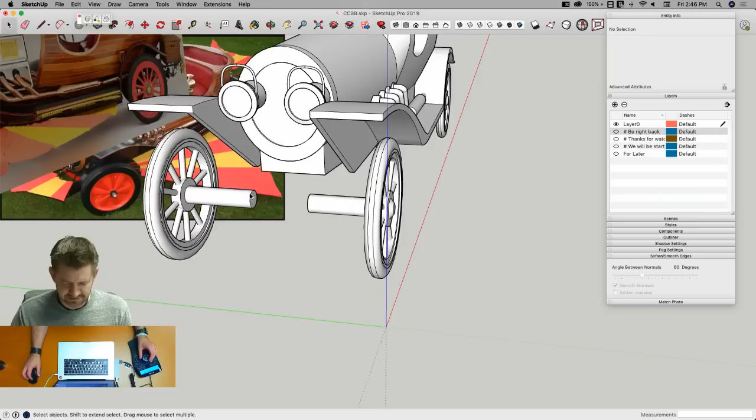Yeah, so let's—and I'm going to do this too because it's killing me that I keep looking at this thing. Well, I'll leave it, I'll leave my watermark for now.

All right, so I'll draw a vertical line like that. Oop, I'm going to draw that again. I'm going to bring something—this is temporary geometry—out like this. Looks like it came out past the wheel. I'm just going to bring it back here an arbitrary distance.

Let's pull this one straight back. I'm brainstorming. All right, this is going to be an arc, I'm going to make this an arc, something like that. I'll draw this down like that.

And then I will take these two, offset that a little bit. All right, that's a thing. And we'll throw a circle out here.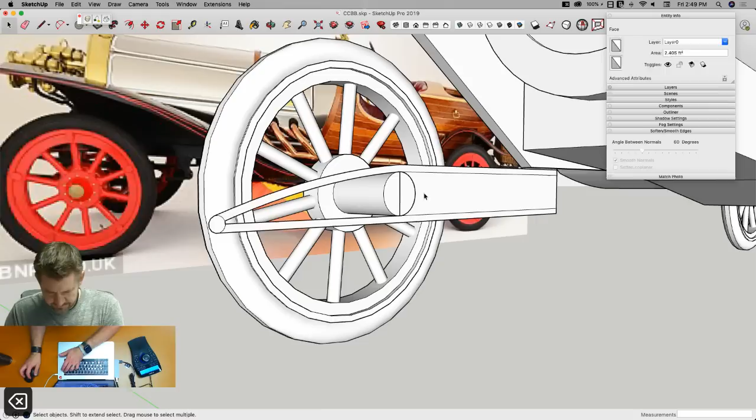All right, so this is going to be my representation of leaf springs basically. I'm gonna take this now, get all this stuff out here, and pull that a little bit longer this way.

All right, this one looks like, oh, there's one to do back here. I want to inverse these ones, so I'm gonna grab it here around the middle. There we go, still not tied to anything, they're still floating, but it's better than what we had before by a little bit.

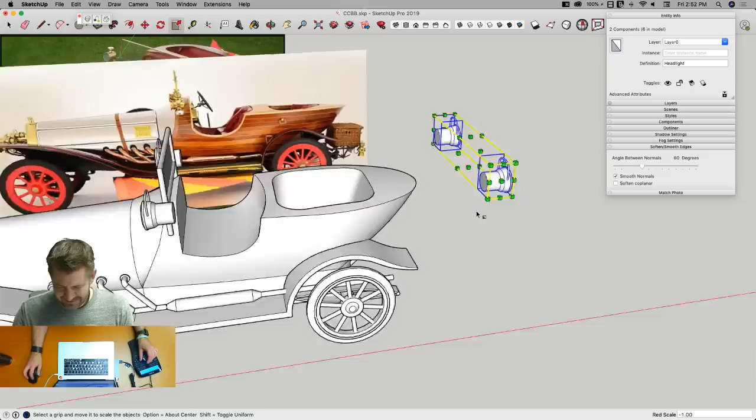All right, delete, I am going to grab one of these and all this, apparently that's circle. And then I can bring that, oh man, stick that on there. Whew, it's coming together. Oh, there we go, Lawrence helping me out here. And Ken Adams. Ken Adam.

Cool, those look more like drawings than plans though. But hey, you know what, I'll say that we have nailed the spirit of this, minus the wings. The general rest of it, I mean look at that, we could pass what we made off for that thing.

All right, speaking of which, oops, that's supposed to be there, that's my wheel, that's my spare. So it looks like somewhere under here-ish I have something popping out. Does look like it goes out parallel, and then it comes back to, let's say here, and then divide that by 4.

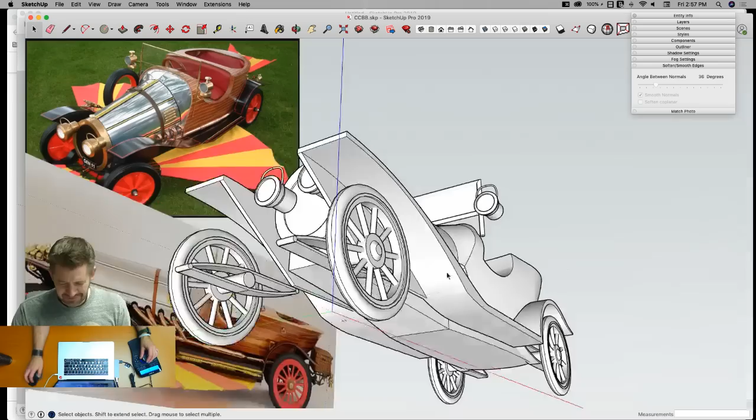Awesome, and it does have, like, well you can see it on my not-reference image, that it does have a little fan looking thing in the front and in the back. I may have to make it up though. Yeah, there we go. There's a picture I've been working from. It's cool, it's kind of like a scallop, that's a fun looking shape.

All right, so we'll get that in. I'm a little confused about where that connects, I'm gonna say it connects right here because I have this thing. All right, bring a line right along, find the midpoint, run that out, use this as my kind of scale. All right, and then I'll come over here and bring one over like that, and then go in the middle point there, and not on the blue axis, come out to about there. I may have to scale all this afterwards.

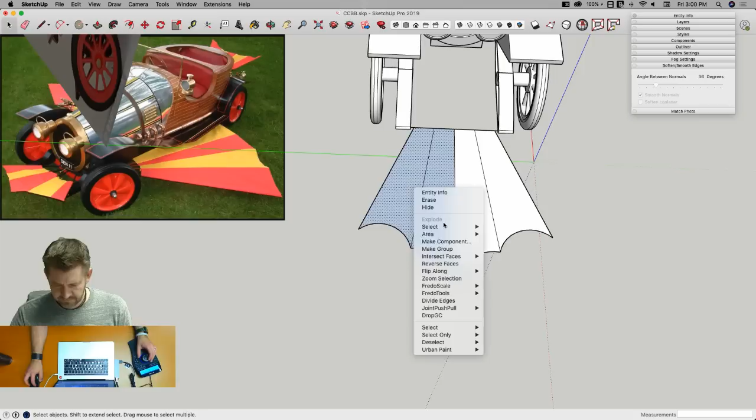But yeah, we can, there we go. That is our rendition of the Chitty Chitty Bang Bang. Like I said, that was totally not where I thought we'd be going with this. But it happened, and you got to watch it happen. So hopefully you guys enjoyed that and picked up a tip or two along the way. I think this worked out okay.

I mean, I think everybody missed Matt. Matt's still, I wonder if, are you still here, Matt?

Yeah, I guess I could actually tie this together with an axle now, huh? All right, you're right, I will do this. I should actually have, this is what I should do. Since all of this is the same, I'm going to take this and make this a component. Axle. And I did have brake lamps on, but then I looked and the image from the movie didn't have them, so I took them off.

All right, I know that's going to have to hook up to steering and stuff's going to have to be there, but is Chitty Chitty Bang Bang, do you guys know, is this like a, I don't remember the story at all. Is that like magic, or how does it all work? Because if it's magic, then I feel like I did a spot-on job and everything will work perfectly. If it's science and invention, then there's probably a few details missing that are probably important to things like flight or even just motion.

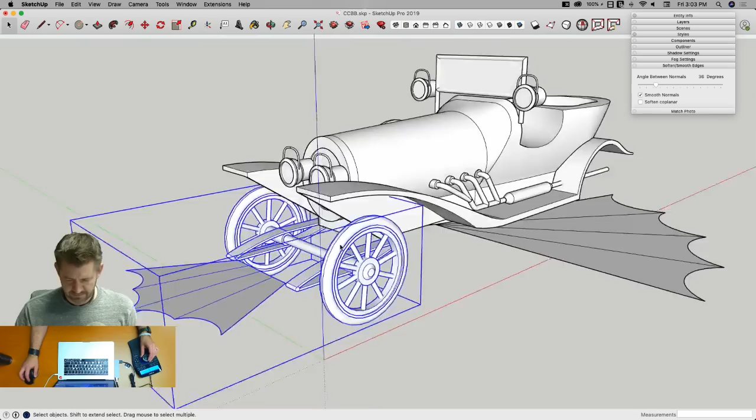It's kind of starting to say goodbye, but now I kind of want to put a little more detail on this thing right here. It did have that belt over the top, and then it had a couple like breaks where I'm assuming this is kind of like where it would fold open. I just want to make something real quick. I haven't said goodbye yet.

I'm going to create a plane to cut that surface. And I'm going to copy it and scoot it back like that. And now I'm going to grab these three surfaces, intersect faces with selection, and I can get rid of all this nonsense. I'm going to save it. I'm going to try to take this and turn on my joint push pull commands. And just do a standard joint push pull. Pull this out, not a lot, just enough to give me that belt on the outside. Sweet.

And then the other spot, this is actually a little bit trickier, I think. Because I wanted to come up with a way to do this easy. I don't know that I got a way to do this easy. So, whoops. What I'm going to do instead of easy...

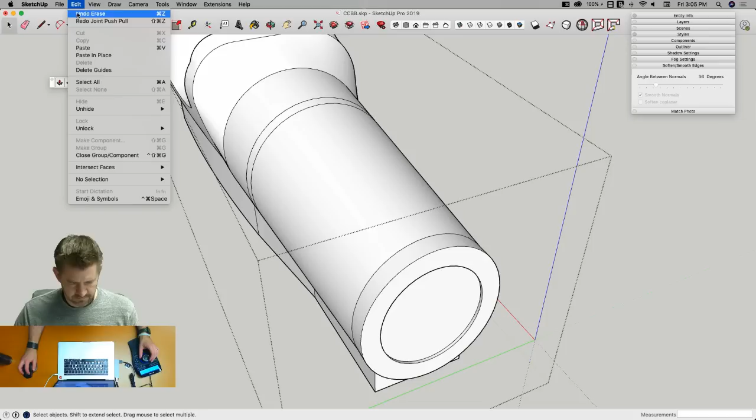One, two, three, okay, so it's going to go something like divide that by 2. Do it again. Divide that by 2. Awesome. Grab all of these surfaces, and this surface, and this surface. Right click. Intersect faces with selection, just give me some cuts. Get rid of all this. Reference. With that, I've just got these nice cuts in the surface. And now I can use joint push pull.

Just, oh, hold up, give me the UI. Because I want to turn off, make sure erase original face is turned on before I do this. And then just double click on each of these surfaces. They'll each pop in.

That's one of those things that stuck out to me when I first opened up that reference image, but oh yeah, that really ties her together. All right, save that. Now we're at a point where I really think, scientifically speaking, this could really fly.

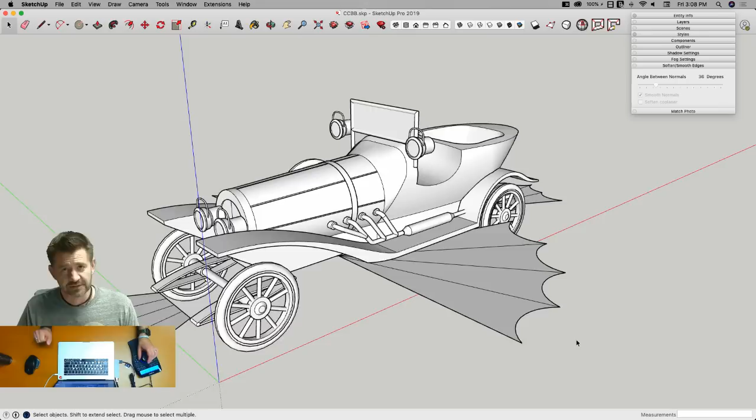Generally speaking, when I do black in SketchUp, I try not to use real black because details get lost in it. With a dark gray like this tungsten, it allows you to still see the edges off of the surfaces and that kind of thing. So I generally don't use black unless I'm intentionally trying to lose detail, like I am under here. I go in here, throw this in here.

So somebody asked how to use the actual picture to pull colors out. What I can do will be specific to Mac only, unfortunately, because the UIs are different, but the general idea is there's a button for this in Windows too. So say I want to get these wheels, the same color red as is in this image. When I go into my colors, whichever UI I'm in, down at the bottom I have this little eyedropper tool. I know it's in the Windows UI too, I just don't remember exactly where.

You can click the dropper icon and that'll let you pick a color, and I can grab that red off of the image. Once that's a swatch for me here, it's real easy to come in and apply that wherever I need that color. Like that.

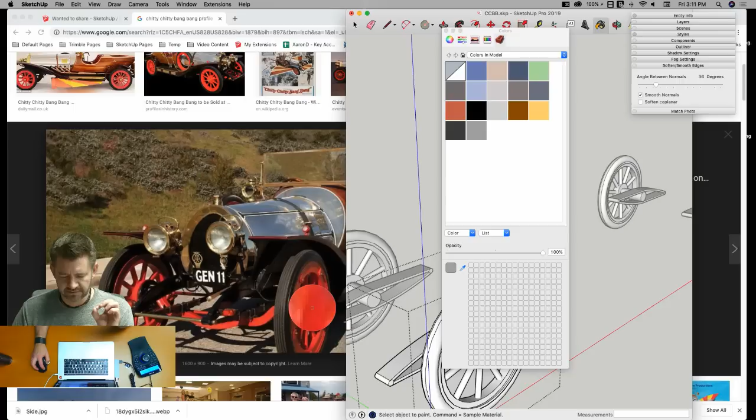All right, I'm gonna use that same black here. I may get a little creative with my paint job on these because, well, I'll kind of copy what we saw in the reference, and I'll throw that red on the outside. Cool.

Let's have the same silvery color, and I'm just going to throw this on the insides of these, and I'm going to try wood paneling here. Let's go ahead and go to our standard wood. We have one that looks like it could be kind of chitty. That's not awesome. All right, so I'm going to change this a little bit.

I'm going to create a plane right here, and I'm going to throw that material on there, and position that texture to make it bigger. The paneling is a little too big. All right, now I'm going to right-click this texture and make it a projected texture. That's going to prevent this warping back here. So when I pick on this, I can just put it right there, and we'll get that kind of thing going on. Try up here too.

Oop, that's not going to work. Well, actually, yeah, it is. That was good. All right, some copper color. Yeesh, a little more red in it than that for copper. A little darker.

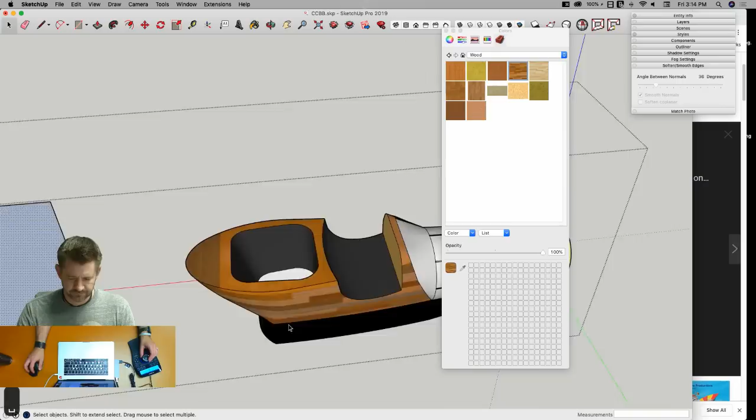All right, last piece is gonna be the wings, and those alternated between orange and yellow. So I'll just go orange, orange, yellow, yellow. Right here, orange, yep, didn't break my surface or something. Oh, that's a little component, I gotta go inside. Orange, orange, yellow, yellow. All right, there we go.

Splash of color. Oops, that's gonna be an issue. Oh, I didn't even group this. Where are you guys on that one? Come on, man, I'm gonna do this all by myself.

I'm just kidding. All right, I want to use that same brass color. And then this piece right here, I'm just gonna go into my glass and mirrors, and grab kind of the standard blue glass. That lets me set transparency. I could grab any color and make a transparency, but that's already there, already ready for me. All right, so there we go.

That looks pretty cool, I'm glad we did this. I'm glad we hung out. I missed you guys last week. It was good to hang out again.

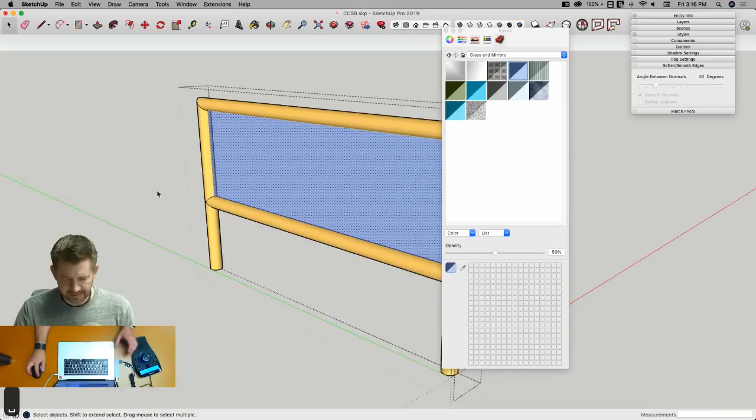Cool, so yep, I will get this. I'm gonna clean up the back end, get that looking a little nicer, and then I will throw this up on 3D Warehouse. So keep an eye out for that.